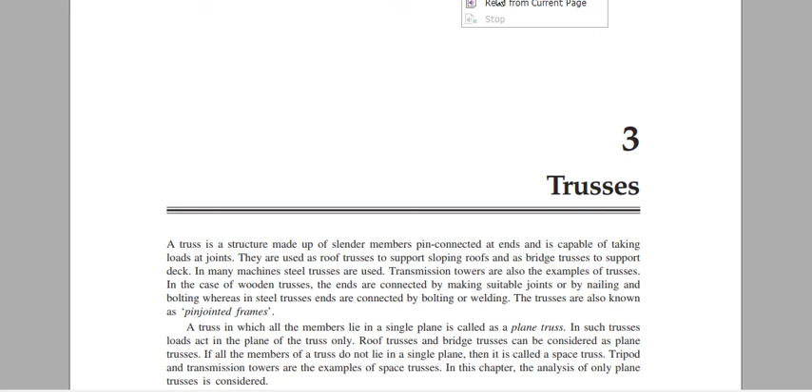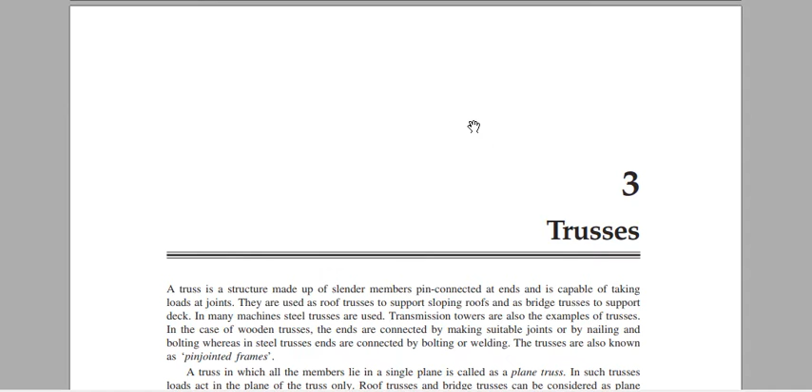3. Trusses. A truss is a structure made up of slender members pin-connected at ends and is capable of taking loads at joints. They are used as roof trusses to support sloping roofs and as bridge trusses to support deck. In many machines, steel trusses are used. Transmission towers are also examples of trusses.

In the case of wooden trusses, the ends are connected by making suitable joints or by nailing and bolting, whereas in steel trusses ends are connected by bolting or welding. Trusses are also known as pin-jointed frames. A truss in which all the members lie in a single plane is called a plane truss. In such trusses, loads act in the plane of the truss only. Roof trusses and bridge trusses can be considered as plane trusses.

If all the members of a truss do not lie in a single plane, then it is called a space truss. Tripod and transmission towers are examples of space trusses. In this chapter, the analysis of only plane trusses is considered.

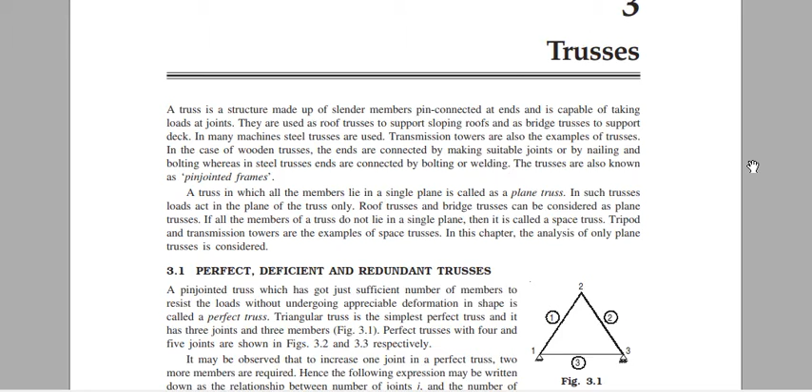3.1 Perfect, deficient, and redundant trusses. A pin-jointed truss which has just a sufficient number of members to resist the loads without undergoing appreciable deformation in shape is called a perfect truss. A triangular truss is the simplest perfect truss, and it has 3 joints and 3 members, Fig 3.1. Perfect trusses with 4 and 5 joints are shown in Figs 3.2 and 3.3 respectively.

The 2 trusses shown in Fig 3.4, A and B, have the same number of members and joints. The truss shown in Fig 3.4 A is perfect, whereas the one shown in Fig 3.4 B is not. It may be observed that to increase one joint in a perfect truss, 2 more members are required. Hence the following expression may be written as the relationship between the number of joints J and the number of members M in a perfect truss: M = 2J - 3 (3.1).

However, the above equation gives only a necessary, but not a sufficient condition of a perfect truss. For example, the truss in Fig 3.4 B is not capable of retaining its shape if loaded at the joint marked 6. Therefore, the only necessary and sufficient condition of a perfect truss is that it should retain its shape when load is applied at any joint in any direction.

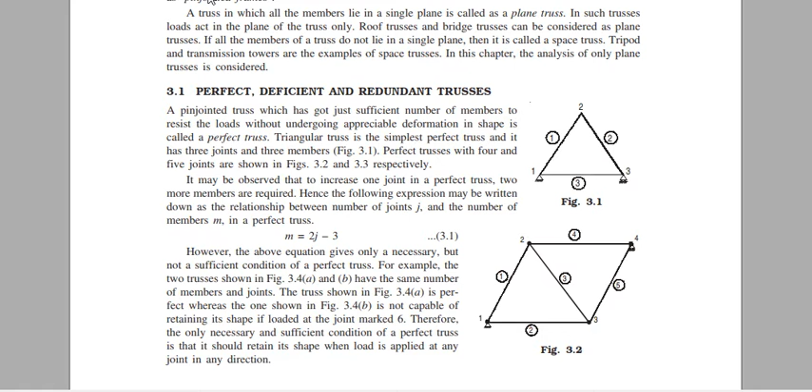Fig 3.4. A truss is said to be deficient if the number of members in it is less than that required for a perfect truss. Such trusses cannot retain their shape when loaded. A deficient truss is shown in Fig 3.5.

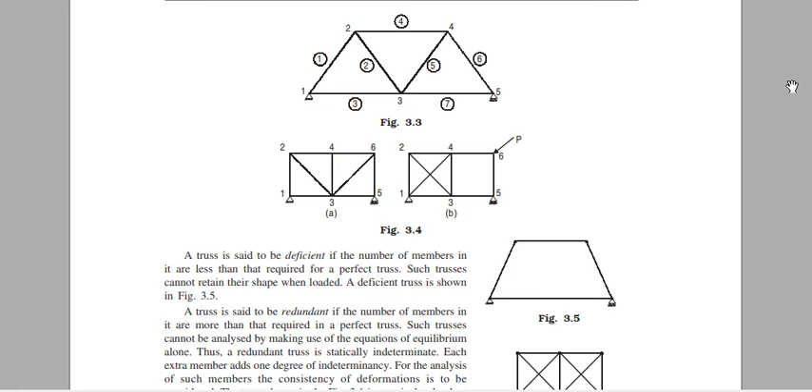A truss is said to be redundant if the number of members in it is more than that required in a perfect truss. Such trusses cannot be analyzed by making use of the equations of equilibrium alone. Thus, a redundant truss is statically indeterminate. Each extra member adds 1 degree of indeterminacy. For the analysis of such members, the consistency of deformations is to be considered.

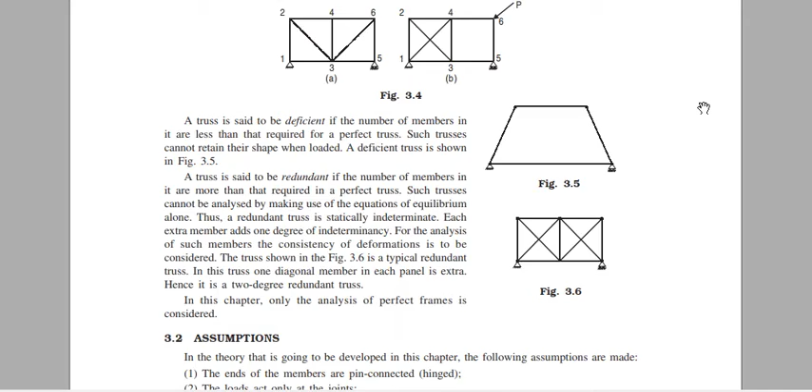The truss shown in Fig 3.6 is a typical redundant truss. In this truss, 1 diagonal member in each panel is extra. Hence it is a 2-degree redundant truss. In this chapter, only the analysis of perfect frames is considered.

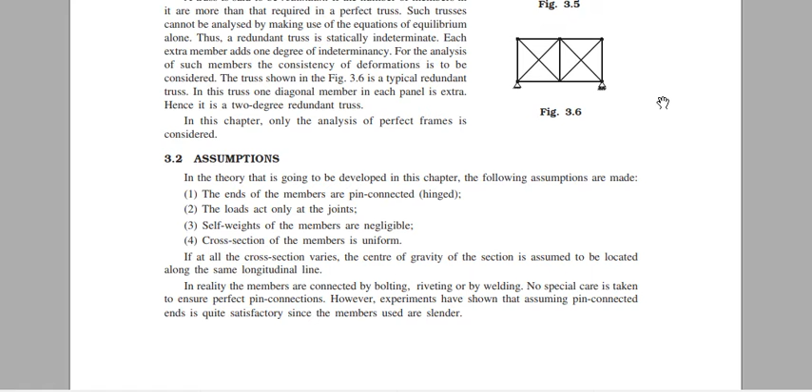Fig 3.5, Fig 3.6. 3.2 Assumptions. In the theory that is going to be developed in this chapter, the following assumptions are made. 1. The ends of the members are pin-connected (hinged). 2. The loads act only at the joints. 3. Self-weights of the members are negligible. 4. The cross-section of the members is uniform. If at all the cross-section varies, the center of gravity of the section is assumed to be located along the same longitudinal line.

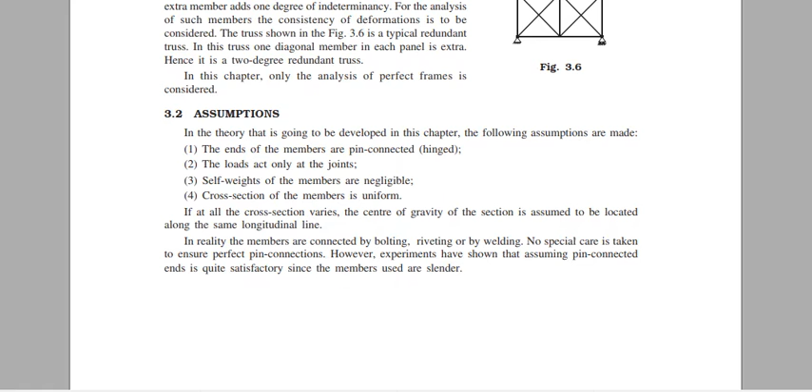In reality, the members are connected by bolting, riveting, or welding. No special care is taken to ensure perfect pin connections. However, experiments have shown that assuming pin-connected ends is quite satisfactory since the members used are slender. Even if a load is not acting at a joint, it can be replaced by its reaction at the joint and a local bending effect on the member.

The frame may be analyzed for the joint loads and the local bending effect on the member superposed in the design of that member. In most of the trusses, the self-weight is really small compared to the loads they carry. Hence self-weight of the members may be neglected.

It is the duty of the construction engineer to see that the centroid of all cross-sections lie along a single axis so that the member is held in equilibrium by the two forces acting at its ends. Because of the assumption of pin-connected ends, it is more appropriate to call the theory that is going to be developed in this chapter as analysis of pin-connected plane trusses. Analysis of rigid frames is not covered in this book.

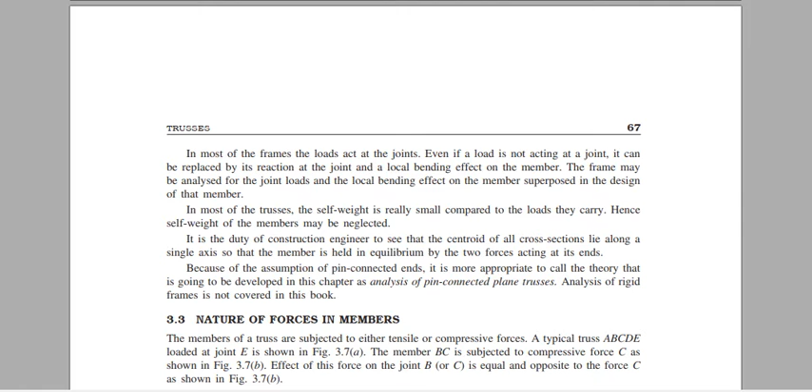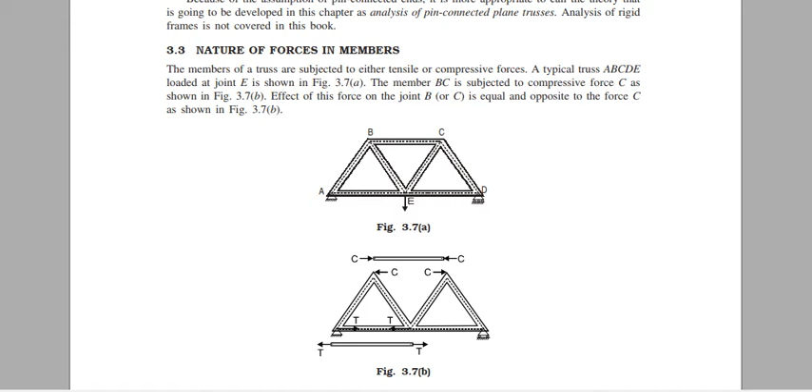3.3 Nature of forces in members. The members of a truss are subjected to either tensile or compressive forces. A typical truss ABCDE loaded at joint E is shown in Fig 3.7(a). The member BC is subjected to compressive force C as shown in Fig 3.7(b). Effect of this force on the joints B or C is equal and opposite to the force C as shown in Fig 3.7(b). The member AE is subjected to tensile force T. Its effect on the joints A and E is as shown in Fig 3.7(b).

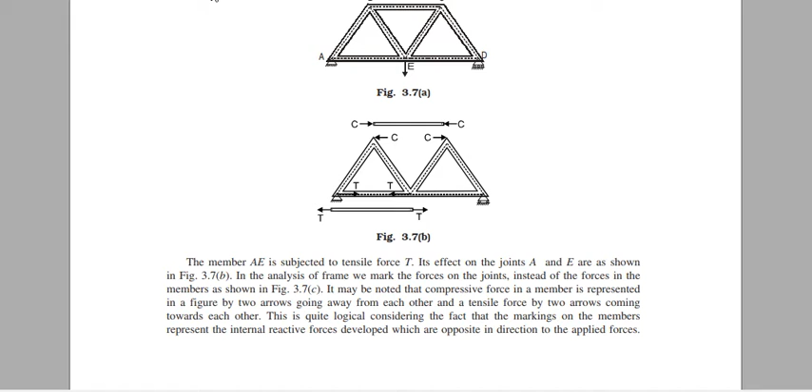In the analysis of frames we mark the forces on the joints, instead of the forces in the members, as shown in Fig 3.7(c). It may be noted that compressive force in a member is represented in a figure by two arrows going away from each other and a tensile force by two arrows coming towards each other. This is quite logical considering the fact that the markings on the members represent the internal reactive forces developed, which are opposite in direction to the applied forces. Compression and tension, Fig 3.7(c).

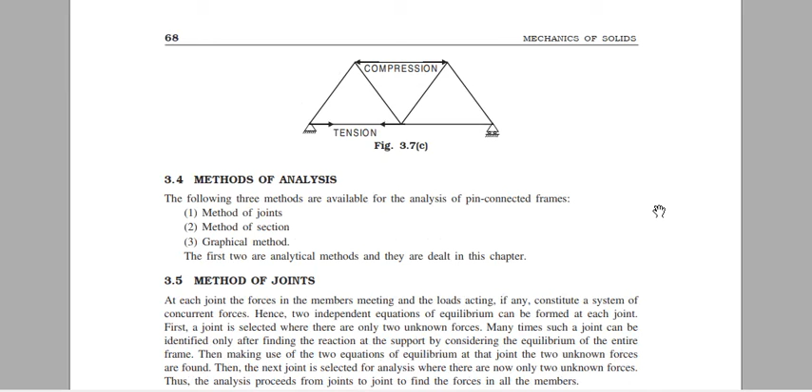3.4 Methods of analysis. The following three methods are available for the analysis of pin-connected frames: 1. Method of joints. 2. Method of sections. 3. Graphical method. The first two are analytical methods and they are dealt with in this chapter.

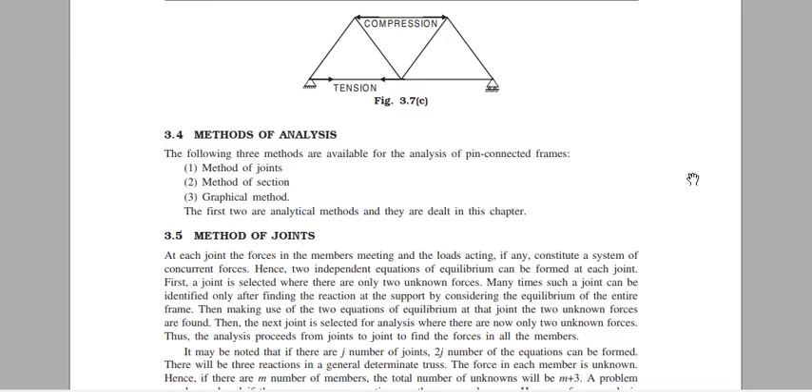3.5 Method of joints. At each joint the forces in the members meeting and the loads acting, if any, constitute a system of concurrent forces. Hence, two independent equations of equilibrium can be formed at each joint. First, a joint is selected where there are only two unknown forces. Many times such a joint can be identified only after finding the reactions at the supports by considering the equilibrium of the entire frame. Then, making use of the two equations of equilibrium at that joint, the two unknown forces are found. Then the next joint is selected for analysis where there are now only two unknown forces. Thus, the analysis proceeds from joint to joint to find the forces in all the members.

It may be noted that if there are j number of joints, 2j number of equations can be formed. There will be three reactions in a general determinate truss. The force in each member is unknown. Hence, if there are m number of members, the total number of unknowns will be m + 3. A problem can be analyzed if there are as many equations as there are unknowns. Hence, a frame analysis problem is determinate if 2j = m + 3 (3.2). This equation is the same as equation 3.1, which was derived on the consideration of a perfect frame. Hence, a perfect frame is determinate.

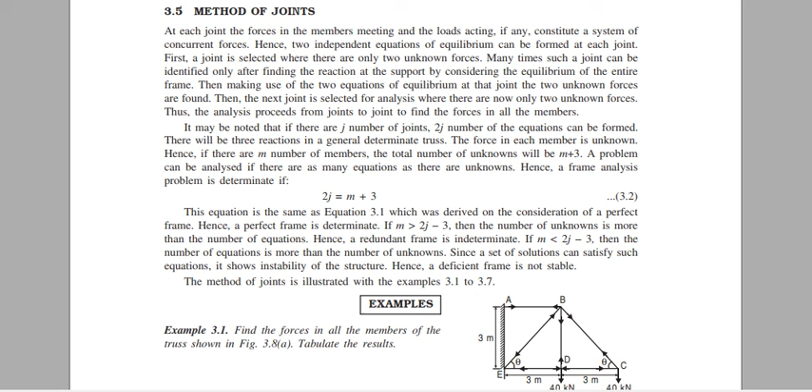40 kN examples. Example 3.1. Find the forces in all the members of the truss shown in Fig 3.8(a). Tabulate the results. 3 m, E, A, B, theta, D, theta, 3 m, 3 m, C, Fig 3.8(a).